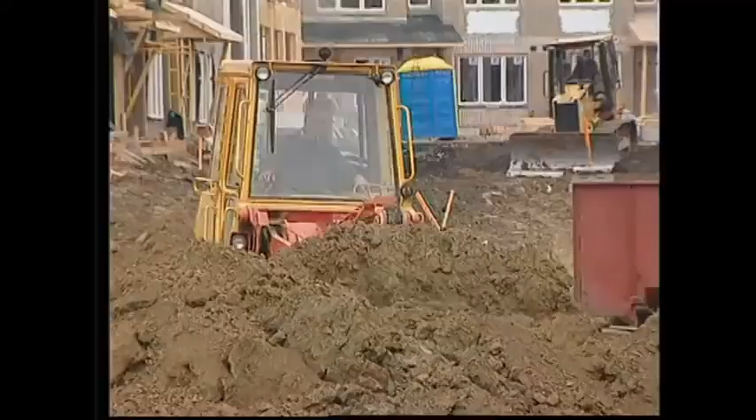Lift truck operators are just like millions of other professionals who earn their living by operating equipment or vehicles. It takes skill, training, and experience, realizing that no job on the ground or in the air can be done at the expense of safety. Remember, you're working on a piece of machinery that weighs about 9,000 pounds. With a load, it increases up to 14,000 pounds. That's equivalent to 6 cars.

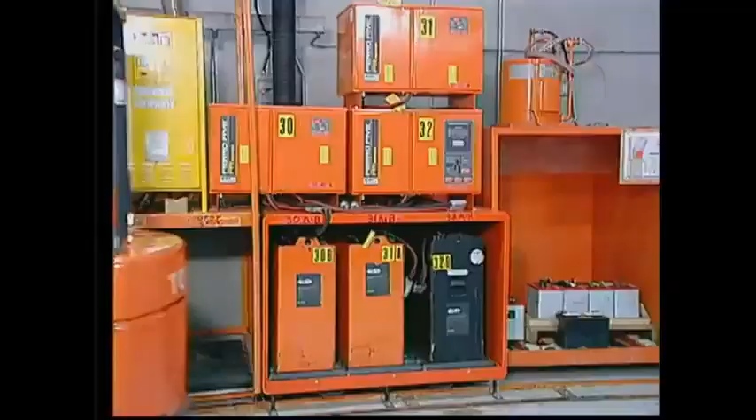Lift truck operators have a difficult job. They lift heavy loads and they maneuver in tight spaces. Safety isn't something anyone sets out to ignore, but tight schedules, heavy equipment, pedestrian traffic, and congested workspace can compromise safety any hour, any minute, any time.

Unfortunately, accidents can happen, but accidents happen more and cost more than we realize. Between lost time, increased insurance premiums, and litigation, it's common for accidents to cost a company over $1 million. Some companies cannot survive the aftermath and close their doors permanently. Then there is personal injury. Let's not forget the family, especially the children. One accident can cost a child a lifetime of happy memories.

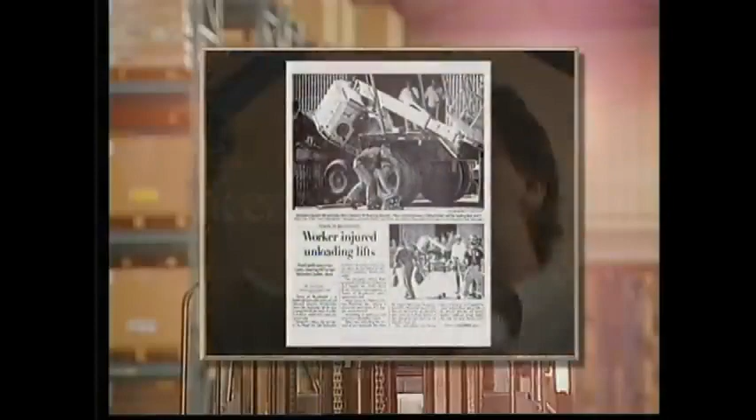But we can improve safety with the right training and the right rules. Government studies have shown effective training programs improve lift truck operators' safety performance by as much as 70%. OSHA, the Occupational Safety and Health Administration, estimates that there are 68,000 accidents every year in the U.S. involving lift trucks. Of those, over 100 people are killed. Here's how the accidents break down in terms of causes.

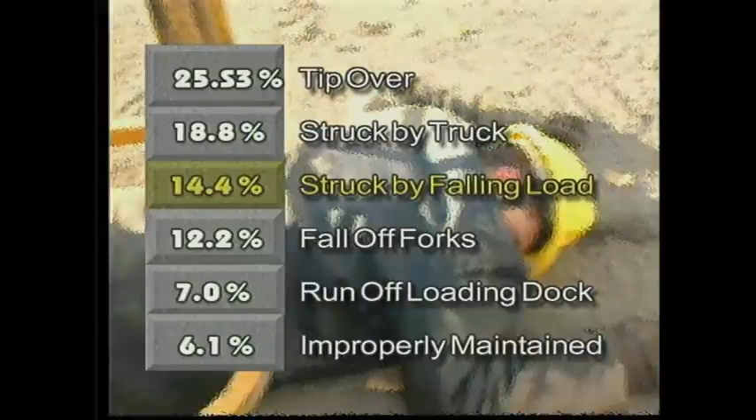25.53% tip over. 18.8% personnel are struck by a powered industrial truck. 14.4% personnel are struck by a falling load. 12.2% employee falls off elevated forks. 7% the lift truck runs off a loading dock or other surface. And 6.1% the lift truck is improperly maintained.

With numbers like these and the cost of accidents, it's no wonder that OSHA requires that employers give proper training to all their lift truck operators. It also states that only trained and authorized personnel can operate a specific piece of equipment.

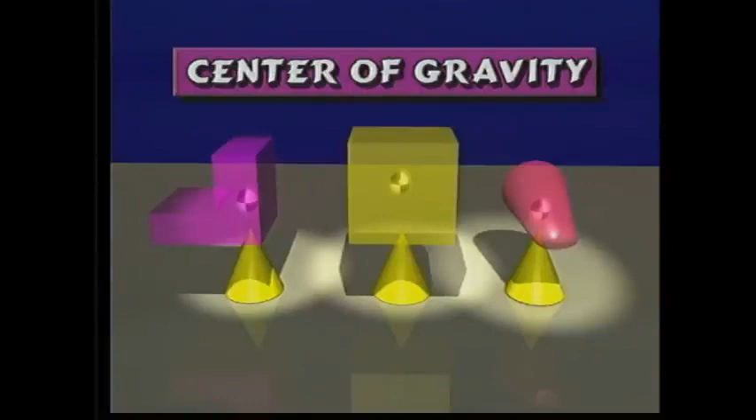Now, let's look at loads. Every object has a center of gravity. These three loads are all the same weight, but because of their different shape, they have a different center of gravity or balance point. When a lift truck picks up a load, the center of gravity of the truck and the center of gravity of the load will produce the combined center of gravity. The combined center of gravity will move in the same direction that the load moves.

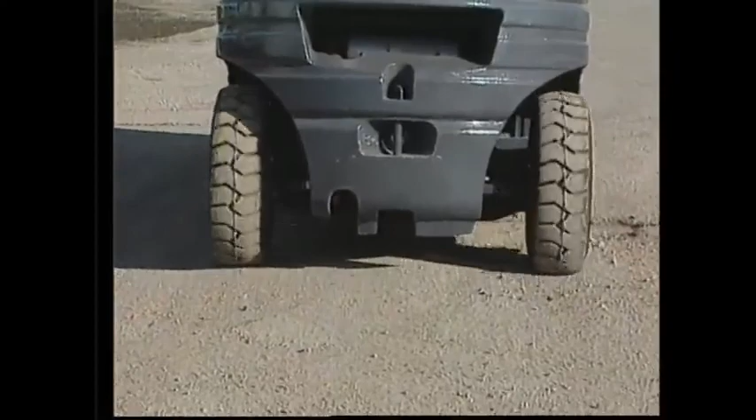A typical counterbalance lift truck has a three-point suspension system. The rear axle pivots at a single point in the center of the axle to compensate for uneven floors. This forms the stability triangle base. With the added dimensions of lift height, it forms a three-dimensional triangle similar to a pyramid. When the combined center of gravity stays within the triangle, the truck is stable. Move the center of gravity forward of the triangle, as when a load is too heavy or too high, the truck will tip forward. This is called longitudinal stability.

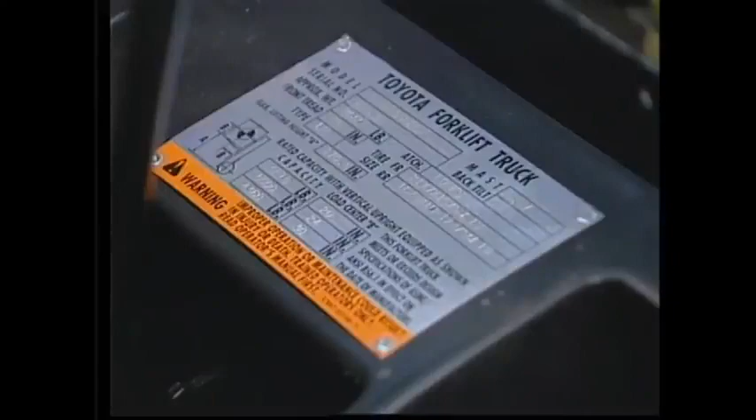Now, a truck must have a nameplate. This shows the maximum weight it is allowed to lift. This truck can lift 5,000 pounds, based on the load having a 24-inch load center. The load center is the distance from the face of the forks to the center of gravity of the load.

In this example, this 5,000-pound truck with a 24-inch load center will attempt to lift this 5,000-pound load. However, because of the unusual shape of the load, the center of gravity of the load is 30 inches from the face of the forks. Notice how the rear wheels lift off the ground when the capacity of the truck is exceeded. Now, if the truck lifts the load from the opposite side, the center of gravity of the load is only 18 inches from the face of the forks.

This load can now be safely lifted. The nameplate will also show the maximum lifting height. The higher the lift, the lower the capacity.

Attachments such as this carton clamp actually reduce the capacity in two ways. First, the carton clamp moves the load away from the operator, reducing load capacity. Secondly, the weight of the clamp will further reduce load capacity. This 4,000-pound truck will now be rated or limited to lifting a load of 2,500 pounds or less.

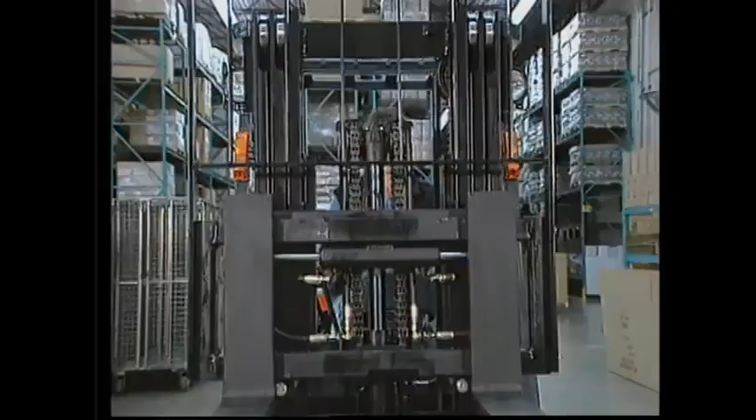If a new mast is installed that changes the maximum lifting height, or if an attachment is changed or installed, a new nameplate must be requested and installed.

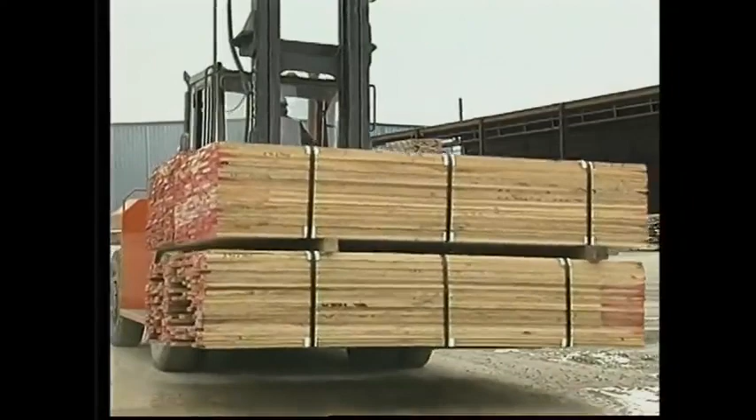Over 1/4 of all lift truck fatalities occur when a lift truck tips over. Understanding the principle of lateral stability will reduce the chance of your truck falling sideways. What do you think? Is a lift truck more stable with a load or without a load while turning? As this lift truck turns with a load, the combined center of gravity moves towards the edge of the triangle.

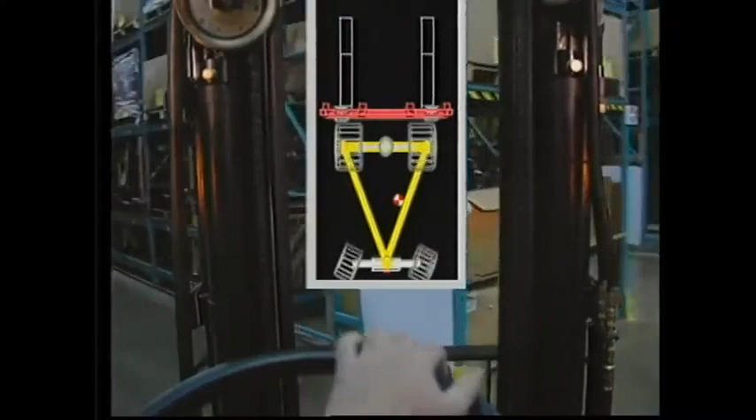Now, notice what happens when we complete a similar turn, this time without a load. Notice the center of gravity is much closer to the edge of the triangle. The closer it is, the less it takes for the truck to become unbalanced and tip over. This is why an unloaded truck should be operated just as carefully while cornering.

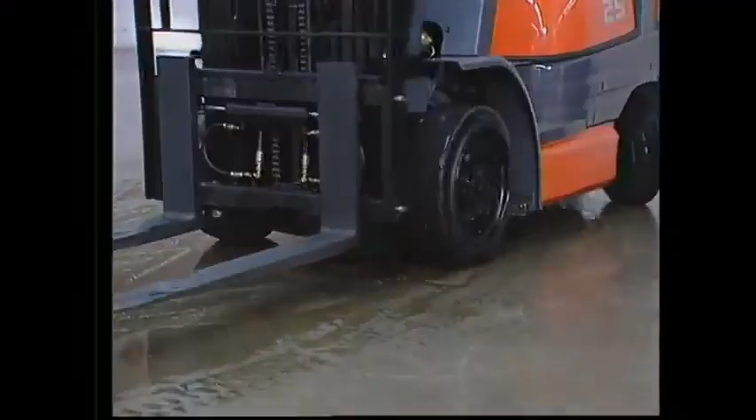Let's look at some causes of tip-overs. Sharp turns, raised masts, unstable loads, potholes, uneven surfaces, wet surfaces, and driving on ramps, to name a few.

On October 17, 1994, Scott was operating a lift truck outside. He was attempting to pick up a load of empty pallets. While making a sharp turn, he hit a small pothole. Scott was fortunate. He had been properly trained. He knew how to best survive a tip-over situation.

First of all, Scott was wearing a seatbelt. When the lift truck tipped, he stayed inside the operator compartment, his best chance for survival. He braced his feet and held on tight to the steering wheel with both hands while leaning in the opposite direction of the fall. Scott was able to escape with minor injuries.

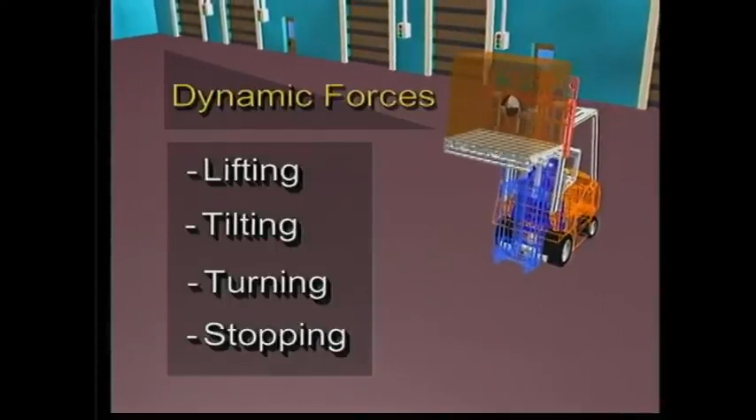Never attempt to jump out of your lift truck if you encounter a tip-over. Had Scott tried to jump clear of the truck, the overhead guard would have struck him, crushing him to death. When a lift truck is in motion, the dynamic forces such as lifting, tilting, turning, and stopping can cause the combined center of gravity to move outside the stability triangle, causing the lift truck to tip over.

When operating a Class 1 stand-up lift truck, operators must be aware of the causes that result in a tip-over situation. These are overloading, traveling with elevated loads, braking or accelerating sharply while turning, handling off-center loads, traveling at excessive speeds, falling from docks, dock plates, and trucks and trailers, to name a few.

With a counterbalance lift truck, the operator is instructed to stay with the truck when it tips over. Stand-up lift trucks are different. In the event your stand-up lift truck is involved in a tip-over or off-the-dock accident, you can be severely injured or killed. To minimize your risk of injury, it is recommended that you step off the rear of and away from your stand-up truck. Safety authorities such as OSHA state, when a stand-up rider tips over laterally, the operator must be trained to step off the vehicle toward the rear of the vehicle.

In this example, the truck is turning a corner too fast with the load raised. As the truck begins to tip, the operator senses this emergency situation and steps out of the operator compartment. In this next situation, the truck is approaching the loading dock too quickly and slides on a wet surface. Unable to stop, the truck continues over the edge. The operator senses this emergency situation and steps out of the operator compartment.

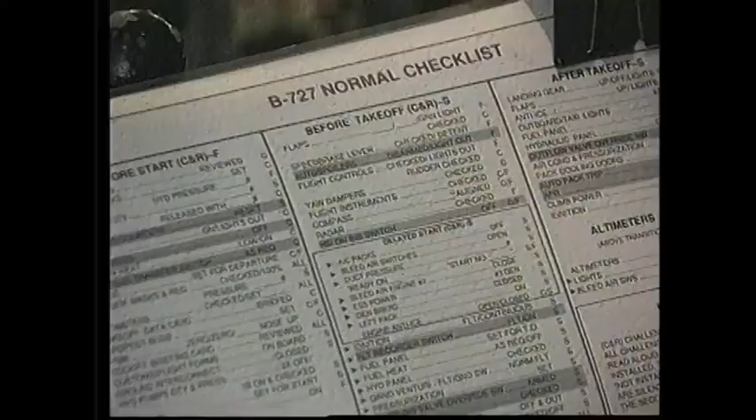When you put your life in the hands of professionals, you do not want them to cut corners. Pilots, for example, use a checklist to do a pre-flight inspection before every flight. 99 times out of 100, everything checks out okay. But it is the pre-flight inspection that contributes greatly to safe air travel.

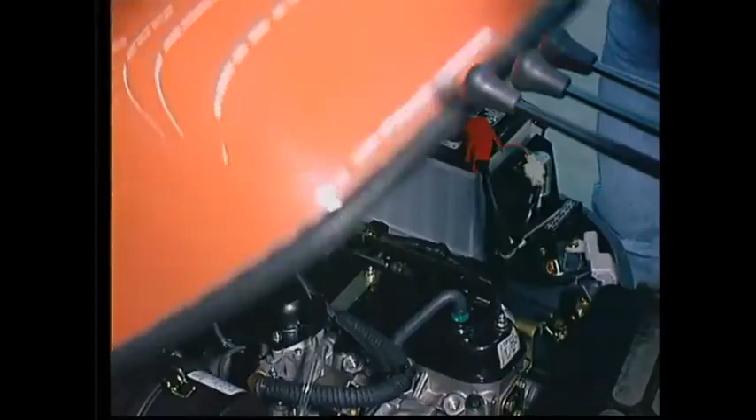It's the operator's responsibility to inspect the lift truck before the beginning of each shift and keep a written record. At times, this task may seem unimportant. However, 6.1% of accidents are caused by improper maintenance procedures. The objective of the inspection is to look for damage and to make sure the truck is in safe operating condition and meets the manufacturer's specifications.

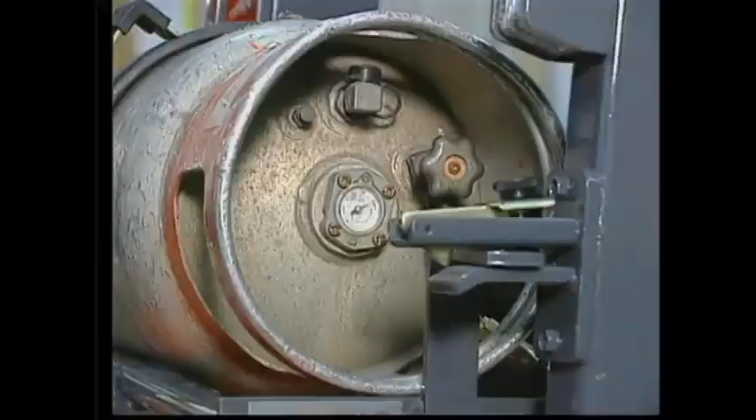A good place to begin an inspection is at the fuel source. In the case of an electric truck, start at the battery. With a propane truck, begin with the liquid propane cylinder. Make sure the locating pin is in place and the pressure relief valve is pointing upwards. Check the fuel level. Don't take a chance on running out where it is dangerous to refuel.

Check the connectors and hoses. Then listen, smell, and look for leaks. Frosting will indicate even the smallest leak. Be careful. Touching this with your bare hands can cause a serious frost burn. Check the cylinder tie-down latches to make sure the propane cylinder is secure.

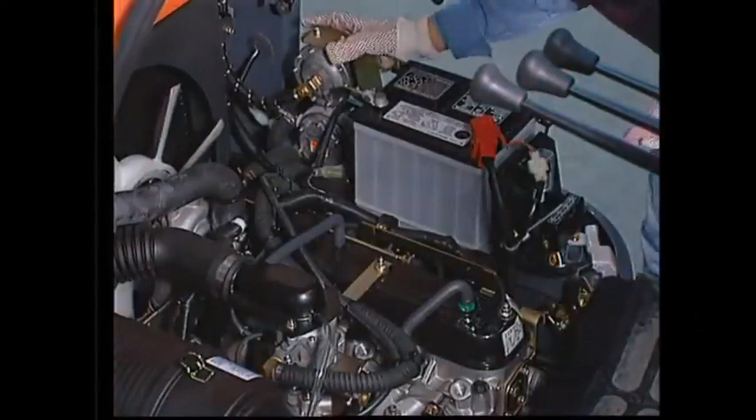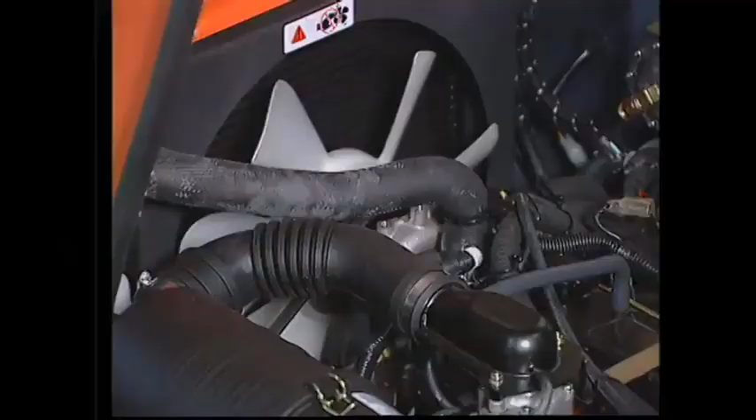Open up the engine cover and inspect the engine compartment and fluid levels. Check the battery, the engine oil, transmission fluid, the fan belts and hoses. It's important that they are not frayed or worn. Check the brake fluid reservoir,

hydraulic oil level, the radiator coolant, and finally, inspect the air filter. A dirty filter can increase harmful or poisonous exhaust gases. Close the engine cover and secure the propane cylinder.

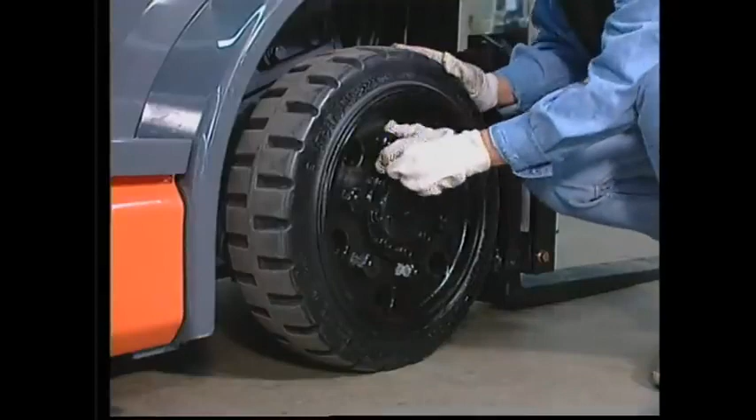Next, inspect the tires and wheels on the right side of the truck. Ensure the overhead guard is in good shape. Are the lug bolts present and tight to the touch? If not, call for repairs. Loose or missing lug bolts can cause damage to the truck or injure someone. Remember, do not operate the lift truck until repairs are made.

Are there chunks of tire missing? Cuts or objects embedded in the tires? How about wire, plastic strapping, string or foreign objects lodged in behind the wheel? These can cause costly damage or serious injury.

If you're inspecting a truck with pneumatic tires, check the air pressure as outlined in the operator's manual. An underinflated tire will lean the truck to one side and will decrease stability. Notice that when the load is being lifted, it is actually moving away from the center of the truck. It wouldn't take too much to tip this truck over.

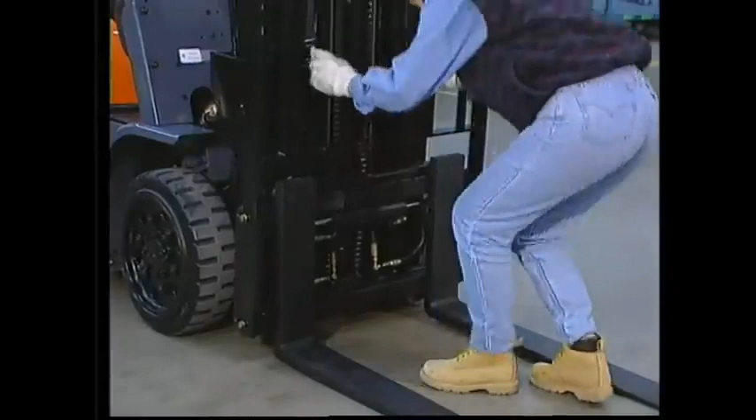Examine the mast and forks. The forks must be level. Look for excessive wear or cracks in the hanger welding or in the heel. The forks must be evenly spaced and the fork pins locked into place. Equal tension in the lift chains is important. This will prevent uneven lifting. Verify that the chain is well lubricated.

Inspect the hydraulic tilt cylinders and lift cylinders. They must be free from leaking hydraulic fluid. Inspect the hoses around the mast. This is where leaks often start. Make sure the mast channel is free of foreign objects, such as pieces of wood or wire. Complete a thorough examination of the wheels and tires on the left side of the truck.

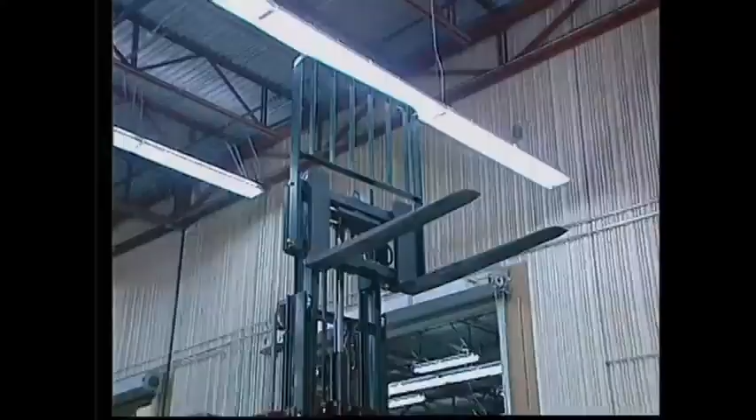To start the engine, make sure the parking brake is on. Listen for any unusual noises as the engine warms up. Pull the lift lever and fully raise and lower the forks to ensure free movement of the mast. Once the forks have been lowered, test the side shifter or any attachments if installed. Tilt the mast back and forth, making sure all hydraulic movements are smooth and operational.

Release the parking brake and drive forward or reverse about 20 feet in total, ensuring the steering and brakes are working properly. Check the brakes. The brake pedal must not reach the floorboard. If it does, the brakes are not functioning properly and the truck should be taken out of operation until repaired.

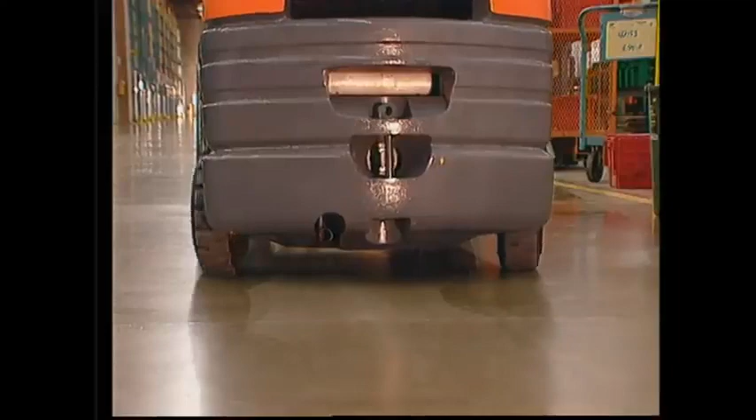When finished, turn off the engine and apply the parking brake. Look under the truck to check for any oil leaks. Oil patches can cause serious injury to pedestrians. Next, inspect the horn, lights, and gauges. Observe pedestrian warnings and any other electrical systems your truck might have.

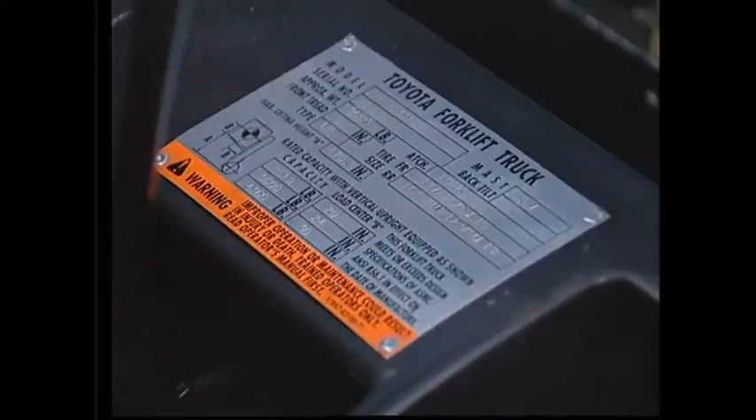A lift truck cannot be put into service until it has a legible manufacturer's nameplate securely fastened. Make sure the seat belt is not frayed or torn and that it latches properly. All safety labels and instructions must be in place and readable. The overhead guard and load backrest extension are important safety features. Make sure they are in place and secure.

Finally, complete and file an operator checklist and report any defects to your supervisor in writing. If you're on the job and notice that your truck is unsafe to operate, park it and tag it out of operation. Report specific problems to your supervisor. Remember, failure to do this could cause injury to yourself and to the employees working around you.

Rules of the road. If you decide to ignore them, you endanger your life and the lives of others. There are federal laws that have established rules for lift trucks. OSHA requires that you be trained and authorized by your employer to use a specific lift truck.

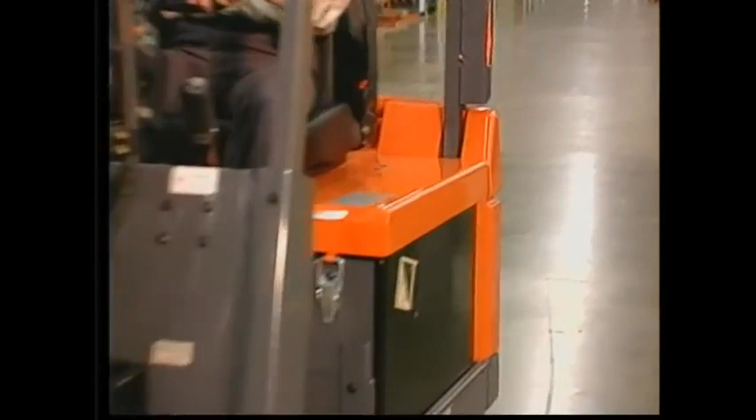Here's how the Industrial Truck Association has classified lift trucks. They fall into 7 main categories. Class number 1, electric motor rider trucks. Class 2, electric motor narrow aisle trucks. Class 3, electric motor hand trucks.

Class 4, internal combustion engine trucks, cushion tires only. Class 5, internal combustion engine trucks, pneumatic tires only. Class 6, electric and internal combustion engine tractors. And Class 7, rough terrain forklift trucks. This video addresses only sit-down counterbalance lift trucks, as described under Classes 1, 4, and 5.

Lift trucks are also designed to work in specialized areas. Underwriters Laboratories has designed specifications for lift trucks working in hazardous areas. A spark can be created by either an electrical system or internal combustion exhaust, causing flammable material to ignite. Make sure your truck is properly rated for the specific conditions of your job.

Before anyone operates a lift truck, they must follow certain safety procedures. Proper safety equipment should always be worn. The wearing of safety equipment, such as safety shoes, is standard operating procedure. Many applications require hard hats, eye protection, or tethers to be worn. When entering the truck, always use a 3-point entry system and fasten your seatbelt. Your specific application may require you to use additional safety equipment. Check with your supervisor.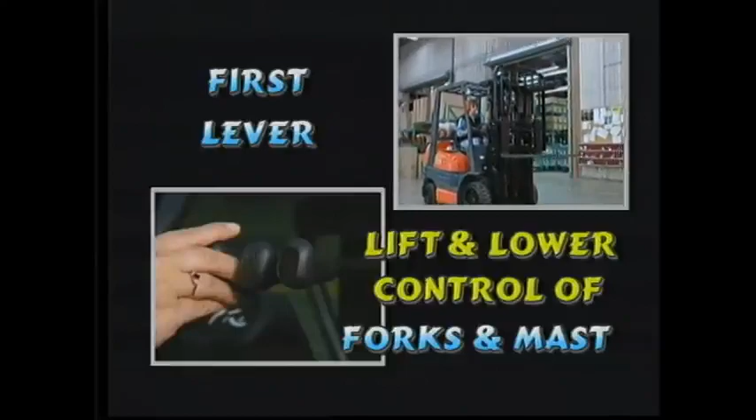Lift trucks have similar controls as cars do: a steering wheel, accelerator pedal, foot brake, parking brake, and key switch. In addition, lift trucks have a directional control lever and hydraulic control levers. On most trucks, the first lever activates the lift and lower control of the forks and mast. The second activates the mast tilting action. The third works as an auxiliary function for an attachment such as a side shifter or a clamp. Remember, using attachments requires specialized training.

Lift trucks need to be highly maneuverable to work in tight places. That's why they steer from the rear. Watch out for tail swing when traveling forward. When cornering, keep the front wheels close to the inside aisle and start turning. This allows room for the rear end to swing out in the opposite direction.

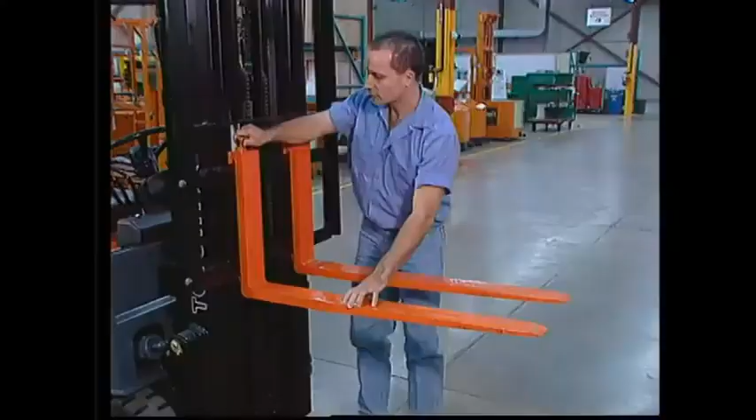Before you pick up a load, make sure your forks are spread as far apart as possible and are long enough to stabilize the load. And remember that the forks must be at least 2/3 of the length of the load to keep it balanced. If the load is over your lift truck's capacity, it must be broken down into smaller loads or use another truck with the proper capacity.

While traveling, make accelerating, braking, and turning a smooth and fluid motion. This will minimize the chance of the load falling off the forks. Keep in mind that 14% of all fatalities involve someone being hit by a falling load. Loads must be stable before you move them. Never reach through the mast to reposition the box. Instead, get off the truck. Make sure the load is against the load backrest extension with the mast slightly tilted back. The pallet should be no more than 4 inches off the ground while traveling.

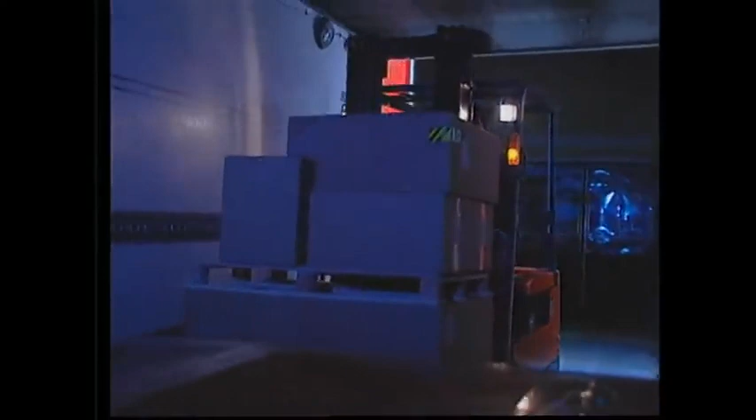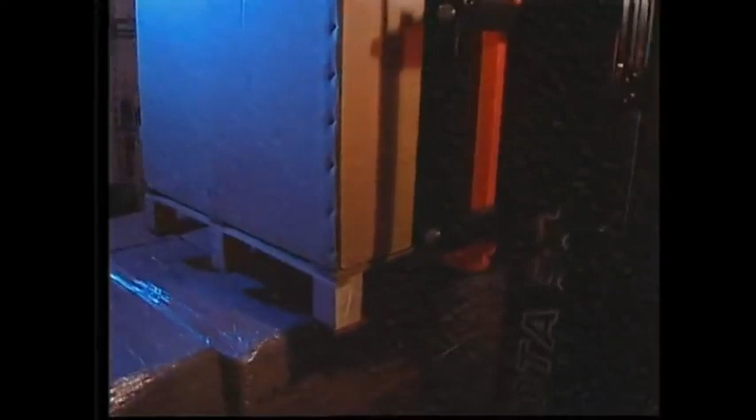On September 21st, 1995, a 31-year-old man was loading a trailer. A box fell off the top of a pallet and onto the floor. The operator put the truck in neutral and went to pick up the box. He did not engage the parking brake. He was pronounced dead at the scene. Cause of death: suffocation.

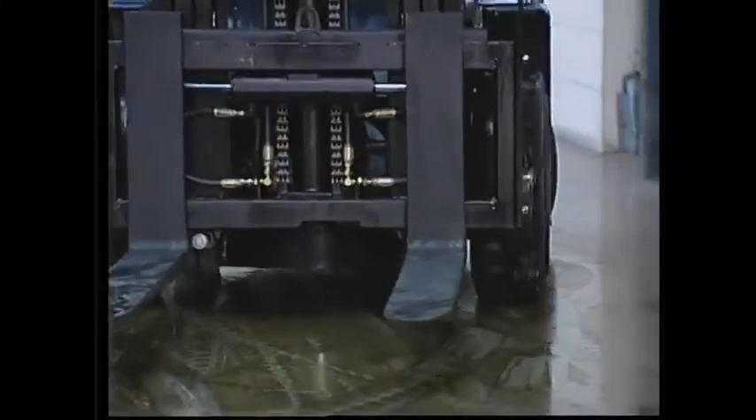Bumps, rough or uneven surfaces, and debris demand your full attention. These can upset your load or unbalance your lift truck. Drive with extra caution when in these environments. If you are carrying a large load that blocks your view, travel carefully in reverse. Use all of your field of view to guide yourself. Wet floors can be a real hazard. Braking and steering can become greatly reduced or non-existent. Drive slowly on wet surfaces.

Before lifting, you should do a quick mental check to question things such as the weight of the load. Is the load stacked securely? And will it fit in the rack? Remember, only raise the load when you have come to a complete stop and are in good position for the lift. Make sure the path is clear and tell anyone nearby to stand back because you will be lifting.

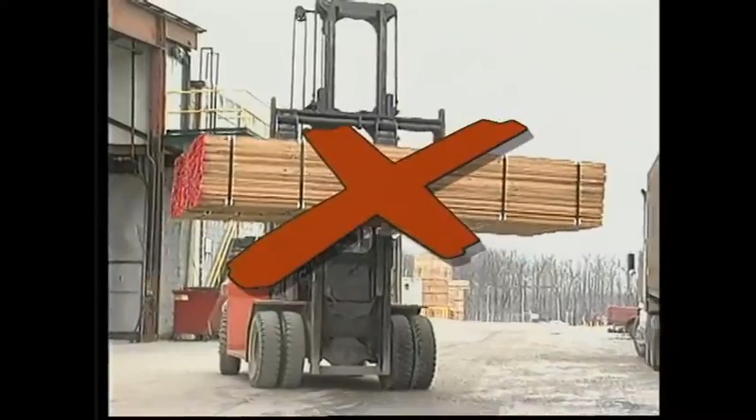Once the load is in position, tilt the mast so that the pallet is level and slowly lower the pallet until it rests on the rack. When the forks are clear, lower them while remaining at a complete stop. Some operators think it's okay to lift and lower the load while they are traveling. Wrong. The lift truck must be completely stopped. Watch out for overhead hazards such as sprinklers, heating systems, and low-hanging doorways.

Electric trucks can also brake by changing the direction of the forward-reverse control lever. This is called plugging. It's a common way to stop the truck, although the foot brake is quicker and more dependable. Remember to stay inside of the driver's compartment at all times. Do not place your hands or feet on or outside of the overhead guard. This is a bad habit that causes many serious injuries.

When crossing railway tracks in a lift truck, angle your truck and proceed slowly. Cross the tracks one wheel at a time to stay in balance. Crossing railway tracks directly will make your truck unstable. All floors and elevators have weight restrictions. Remember to combine the weight of the truck and the load to determine the total weight.

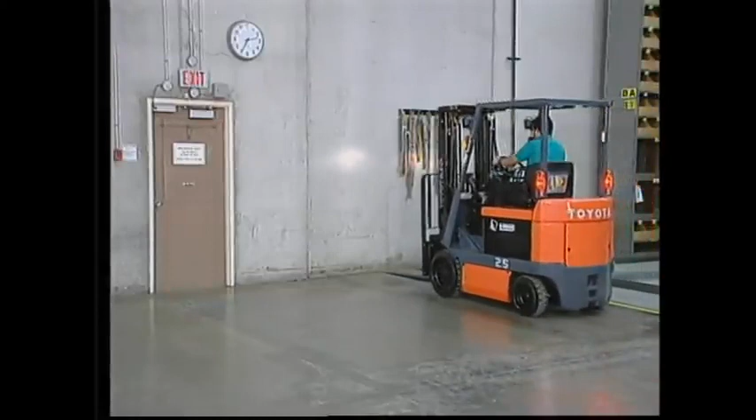When you are finished using the truck, park it in a designated area and remember to turn off the key. Never park in a fire lane or block a doorway. Lower the forks so that they are flat on the ground. Put the controls in neutral with the parking brake on. Turn off the valve on the propane cylinder to prevent a fuel leak. Disconnect the battery connectors if using an electric power truck.

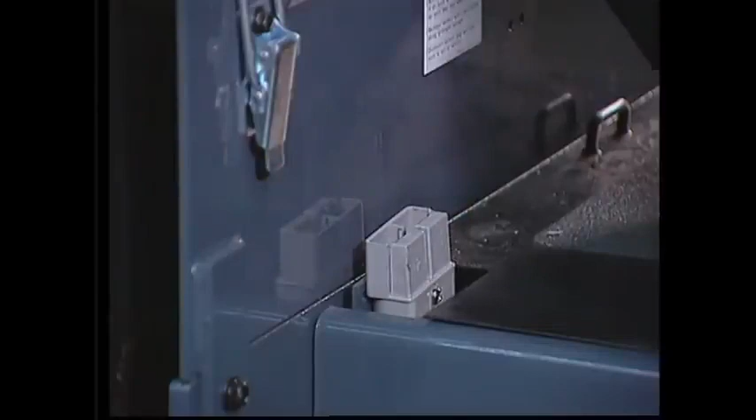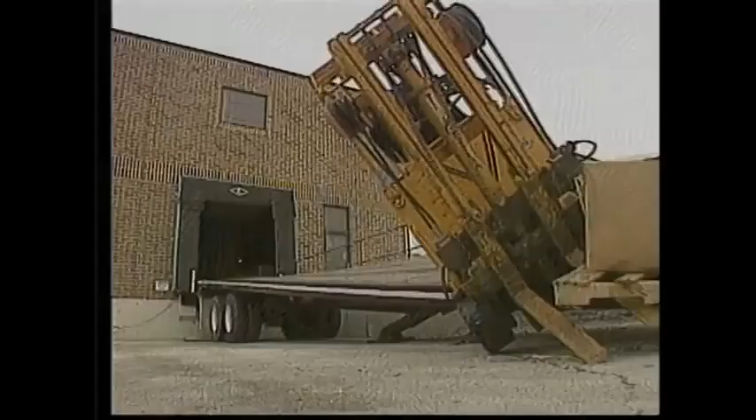Loading docks are busy places for pedestrians and equipment. On average, a lift truck may pass over a dock 100,000 times per year, so there are plenty of chances for accidents. Statistics show that over 7% of accidents happen in the loading dock area. If the area between the trailer and the dock is not safely secured for any reason, the lift truck can fall through the gap, causing injury or death.

A common cause of trailer separation accidents is early departure. This is where a tractor-trailer driver assumes loading or unloading is complete and pulls away from the dock while the lift truck is entering or leaving the trailer. If the lift truck does not have enough time to stop, it can fall off the dock or trailer. Even if wheel chocks are still in place, they offer little protection if the tractor-trailer driver leaves before it is safe.

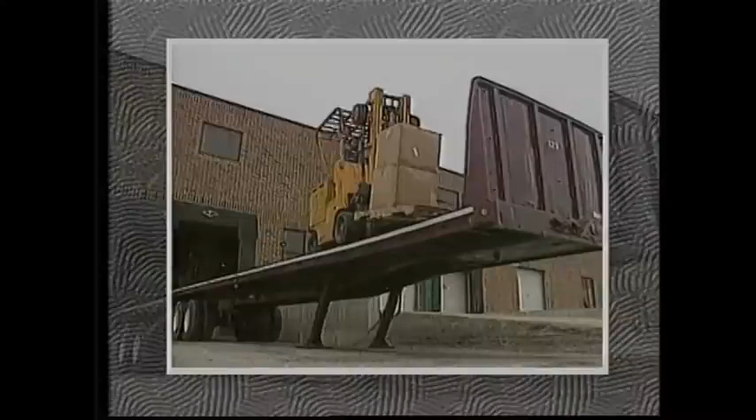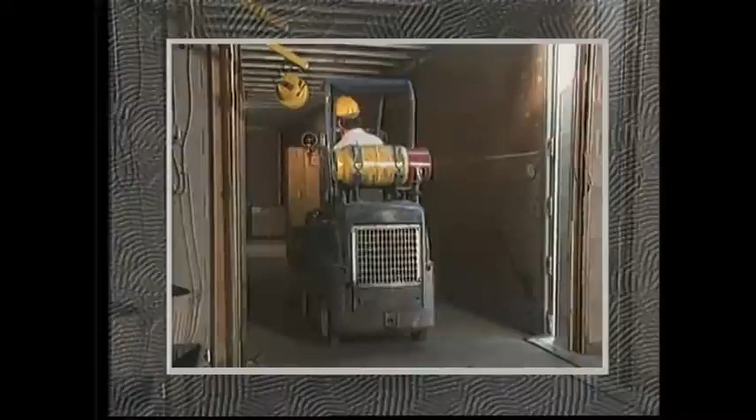Landing gear collapse is another safety hazard. When the tractor has been removed from the trailer, certain safety precautions must be taken. If the landing gear is weak or corroded, it may collapse due to the weight and forward motion of the forklift entering the trailer. Trailer upending is another hazard caused by the heavy loads being placed in the nose of the trailer that exceeds the counterbalance effect of the trailer's rear axle. Therefore, uncoupled trailers must be secured with a support jack before entering with a lift truck.

The most common form of trailer separation is trailer creep. As the lift truck travels on and off the trailer, its momentum inches the trailer away from the dock. To demonstrate this, the wheel chocks have been removed and the brakes released from this tractor trailer. As this moving lift truck stops, its weight forces the entire rig to move away from the dock. This is why the tractor trailer must be safely secured against the dock. Tractor trailer brakes must be engaged and wheel chocks must be properly installed.

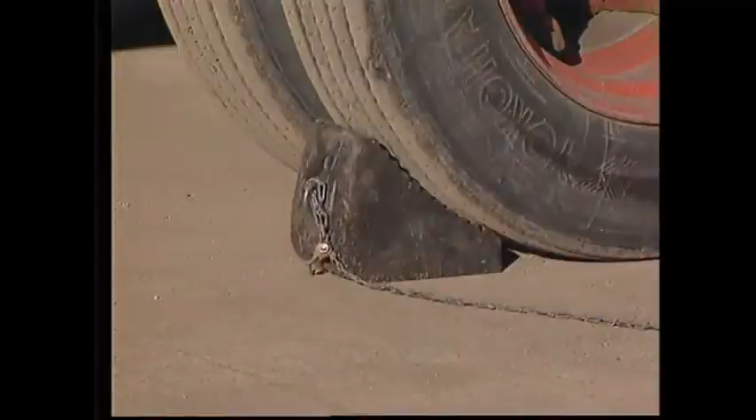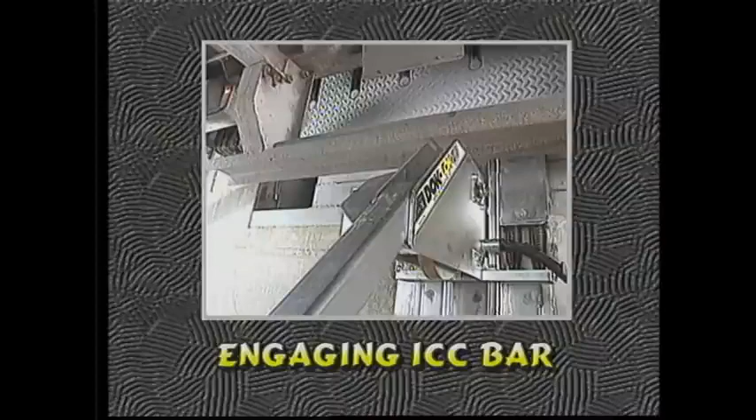However, wheel chocks have their limitations and could fail if placed on ice, gravel, or sand. For increased protection against these types of accidents, many companies have installed vehicle restraints that either hold the trailer firmly against the dock by engaging the trailer's ICC bar or by locking the trailer rear wheels with dual steel barriers.

Lift truck operators are responsible to ensure the trailer is ready for safe loading or unloading. Once the tractor trailer is secure, carefully position the dock leveler in place. Make sure there is proper lighting. Poor lighting increases the chance for injury and/or product damage. The floor of the trailer must be inspected to ensure it is in good condition, and the combined weight of the lift truck and load do not exceed the maximum weight capacity of the trailer.

When backing out, stop at the end of the trailer and look both ways for pedestrians. Accidents on the dock happen every day. By knowing the safety hazards in this area, you can make the loading dock area a safe place to work.

Pedestrians are involved in about 40% of all lift truck accidents. 18% of them are fatal. On August 8, 1993, a man was taking inventory in a warehouse. A lift truck carrying a load of boxed metal parts was stacking a load. While backing out, his forks caught the pallet and it fell.

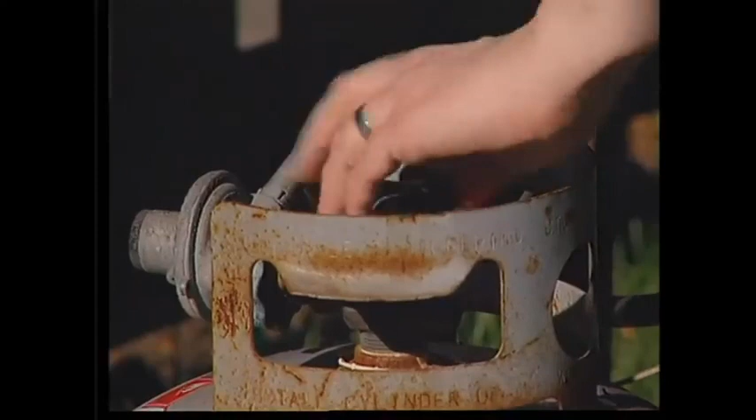Liquid propane gas is a popular fuel for many uses. When handled properly, it's safe. When handled improperly, it can cause serious injury or death. Don't let this happen to you. Liquid propane gas is a liquid that normally boils at minus 44 degrees Fahrenheit. But when stored in a high-pressure cylinder and compressed 270 times, it stays liquid at room temperature.

If released, the expanding gas can cause a serious frost burn when it comes in contact with unprotected skin. For this reason, eye protection and heavy gloves should always be used when handling liquid propane gas. Liquid propane gas is heavier than air and will travel along the ground like water. Escaping liquid propane gas can be extremely dangerous if it is allowed to move to a low area where it can collect and ignite.

Here's how to minimize the chance of liquid propane gas leaking while changing the cylinder. These procedures must be followed. Start by parking the lift truck. Set the parking brake. Lower the forks. Place the transmission in neutral and leave the motor running. Put on your protective safety gear.

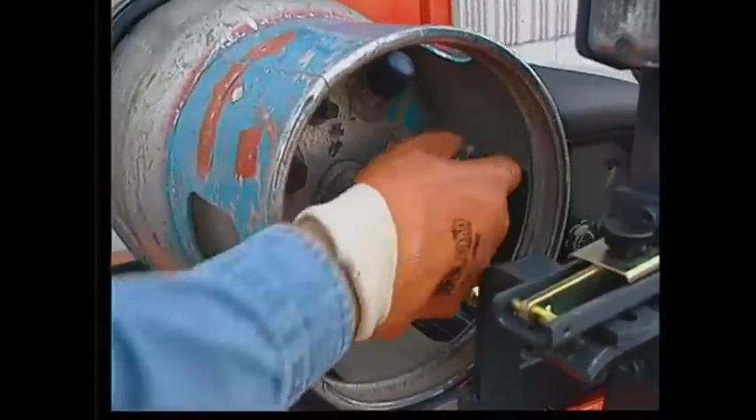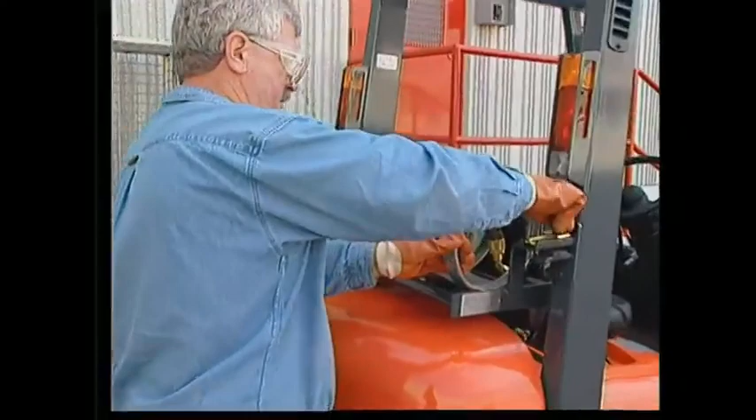Then, turn off the valve on the liquid propane gas cylinder and allow the truck to stall due to lack of fuel. This reduces the pressure of the gas in the fuel lines. Next, turn off the ignition and then try to restart the motor. If the truck will not start, you may proceed. First, uncouple the hose from the valve. Remove the cylinder and store it outside in a safe and approved method.

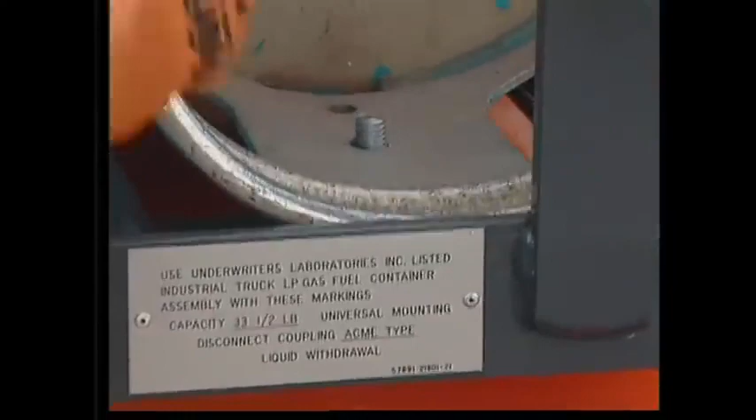When installing the full liquid propane gas cylinder, handle it with care. The liquid propane gas is under high pressure. Check the new cylinder for proper seals and gaskets. Don't risk leaks with a bad O-ring. Now, place the cylinder on the locating pin and set it in the liquid propane gas tank bracket. Remember, the pressure relief valve always points upwards.

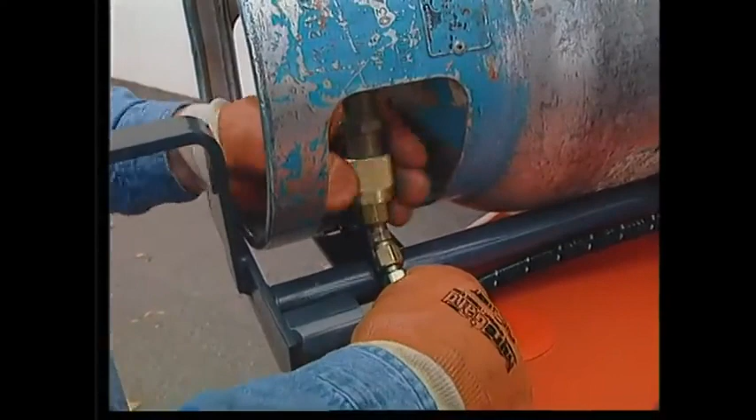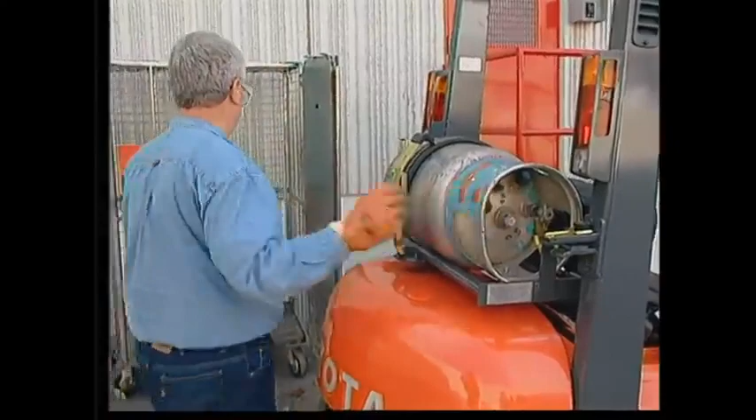Secure the cylinder with the bracket restraints. Open the valve slowly. Look, listen, and smell for leaks. Frost on a fitting is a sure sign of a dangerous leak. Ensure that the cylinder is secure. Now you're ready to go.

For diesel or gasoline refueling, drive the lift truck close to the pump and turn off the truck. Open the gas cap and feed the nozzle into the tank opening. Turn on the pump and proceed to fill the tank. Do not fill the tank completely. This will minimize the chance of fuel spilling out while driving.

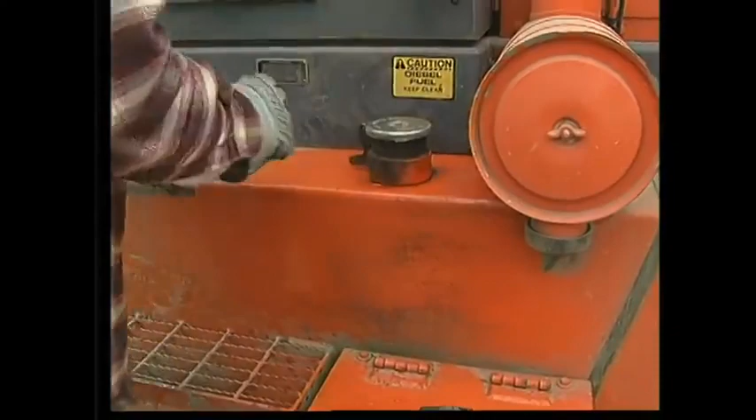When finished, replace the cap and clean up any overspill with a cloth. Finally, start your truck and proceed with your work in a safe manner.

In many ways, industrial batteries are like young infants. They need to be changed and cleaned regularly. If they become too tired, they start to act up. They constantly need to be replenished with water. But given too much, they'll spit up all over. If you take care of your battery, it will last for many years. Ignore it, and you will have problems.

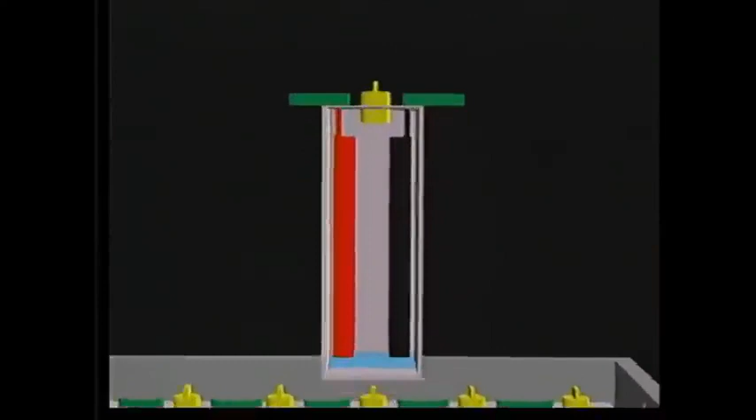The typical industrial battery is really a series of individual cells joined together by lead connectors. Each cell has a positive post and a negative post. The cell is filled with a solution of sulfuric acid and water called electrolyte. Each cell generates approximately 2 volts of electricity.

When it's time to recharge the battery, park the lift truck with the emergency brake on. It is best to recharge the battery when it's out of the truck. But if that's not possible, fully open the battery compartment to allow heat and hydrogen gas to escape. Hydrogen is a highly flammable gas, and for this reason, batteries must only be charged in well-ventilated areas. No smoking or open flames are permitted.

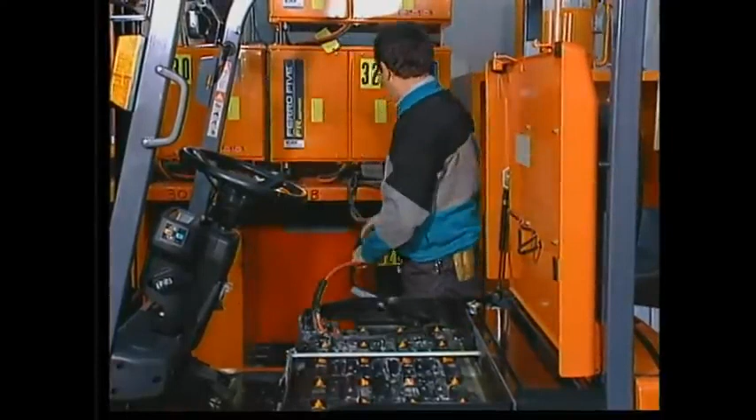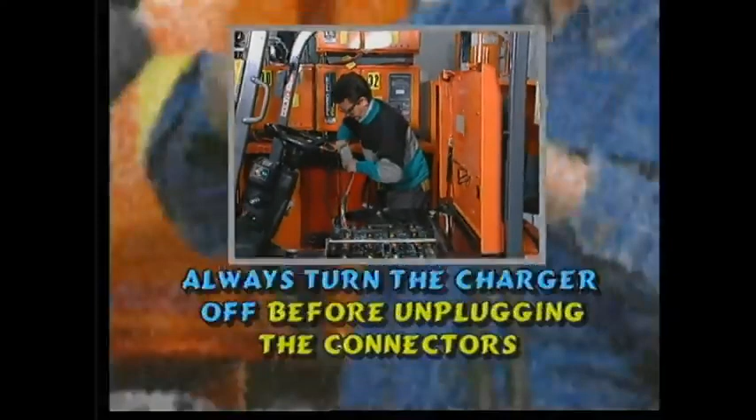Unplug the battery connector from the truck and attach the charger connector to the battery, never to the truck. Check the cables for wear and the connectors for damage. Turn on the charger following the manufacturer's instructions. When the charging process is complete, always turn the charger off before unplugging the connectors.

In March of 1995, a newly trained operator was testing the electrolyte with a hydrometer. He was not wearing any face protection.

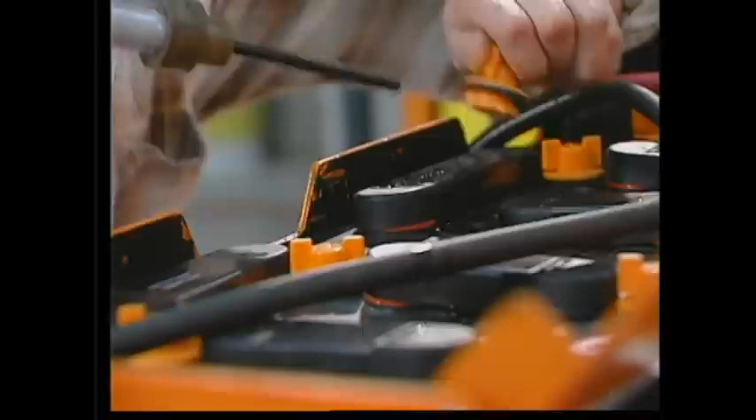He squeezed the hydrometer too hard. This caused the electrolyte to spray up on his face. He immediately went to an eye wash station. Luckily, he was trained on what to do if he came in contact with acid and suffered no injuries.

You should always wear protective equipment when you're anywhere near battery acid. Gloves, goggles, and a body shield are mandatory. Have an eye wash station nearby. If acid gets into your eyes, go immediately to the eye wash station and run water over the affected area.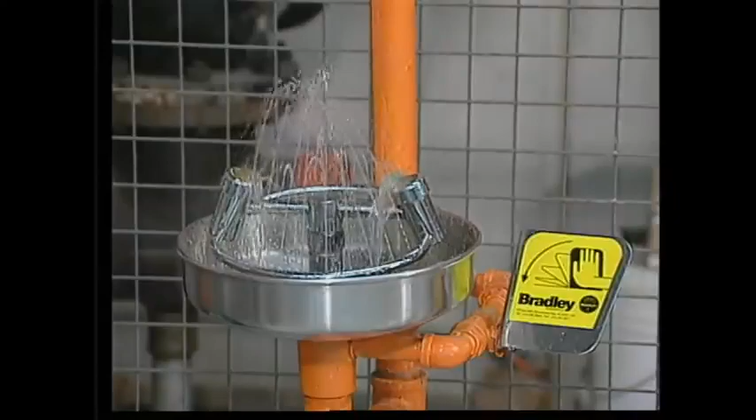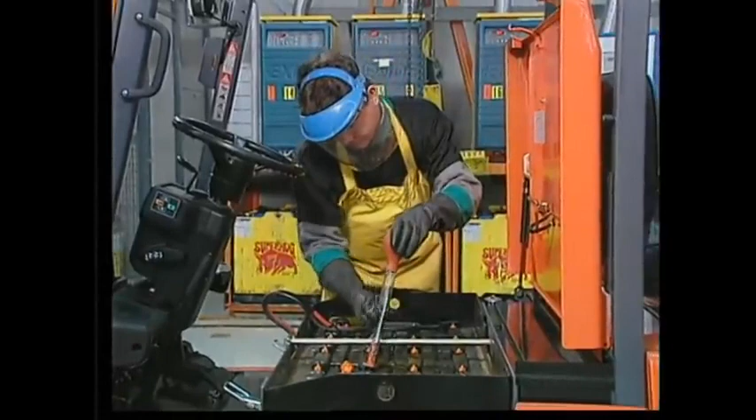Then, get medical attention. After charging, remove the caps of 3 or 4 cells to determine the electrolyte level. Only a flashlight can be used to look into the cells. When the battery is fully charged, the electrolyte has a high acid content. This can be tested with a hydrometer. By testing a small sample of electrolyte, you can determine how much energy is in a cell. This will also locate bad cells in a battery.

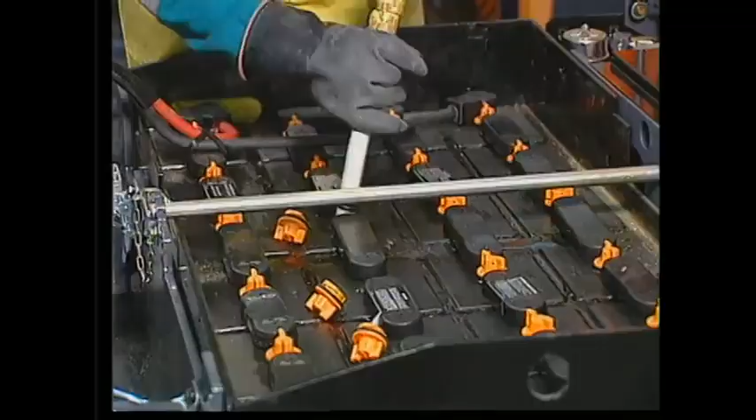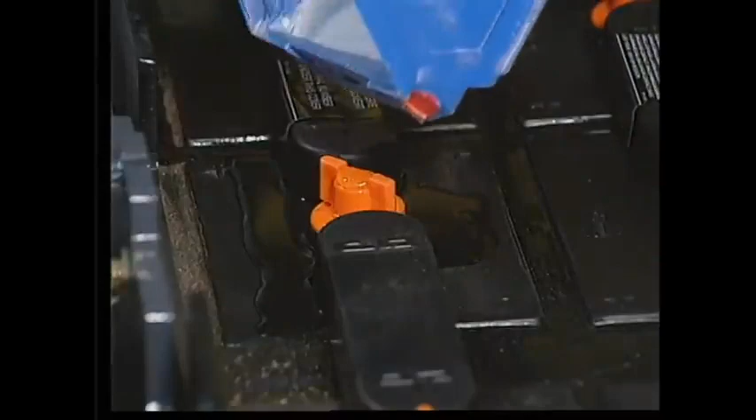To avoid acid spills, only add water after charging. Adding too much water before charging will cause overflow during charging and create a hazardous spill. If electrolyte does escape, it must be neutralized with baking soda and water.

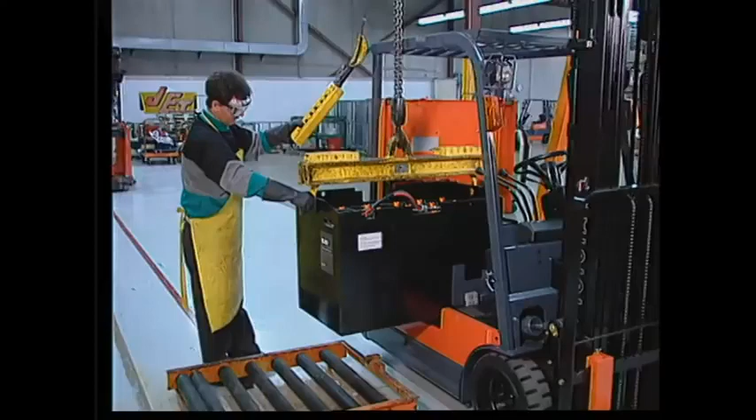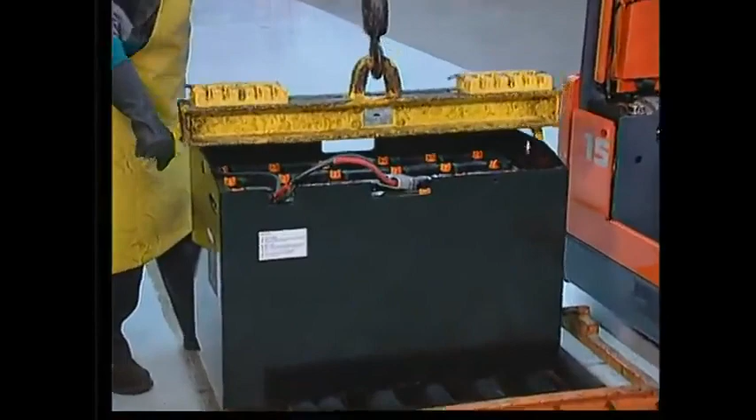Many people use a crane to remove the battery from a lift truck for maintenance. Carefully attach an approved insulated lifting beam to the battery and lift it out. Place it near the charger, then pick up the freshly charged battery. Be careful, the battery weighs thousands of pounds and can crush your hands or feet. Use only equipment designed for this purpose.

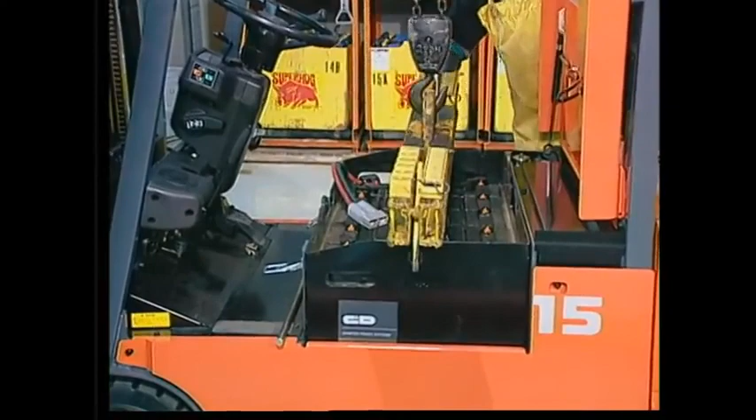Electric trucks depend on the battery to balance their loads. Use a battery that is the proper weight and voltage. Check the lift truck's nameplate and compare it with the battery's weight and voltage as marked on the battery casing. Join the connectors and close the cover.

Some trucks use battery slides. Remove the safety gate and roll the battery out of the truck. In order to align the fresh battery to the battery compartment, connect extension cables. Then, drive the truck into position. Remove the extension cables and roll the fresh battery into the truck. Replace the safety gate, and then connect the battery cables.

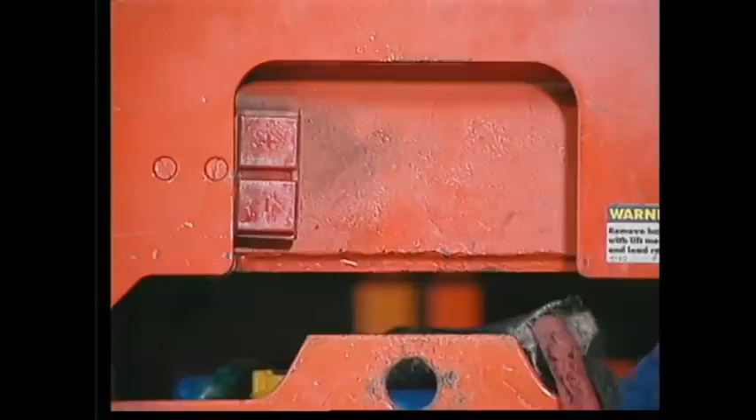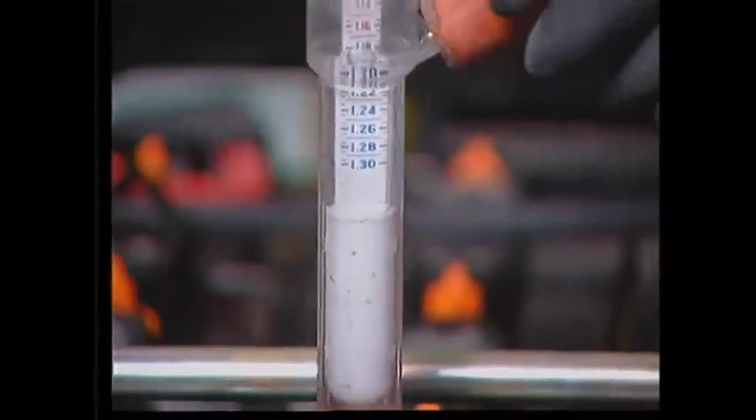Here are 10 tips on how to get the most out of your battery. Follow the manufacturer's instructions. The life of a battery and your lift truck controls can be severely shortened by not following the manufacturer's instructions on charging and maintaining the battery. Inspect the connectors. A loose, cracked, or pitted connection can cause arcing or sparking. Don't use the connector as a switch. Always shut off the charger when connecting or disconnecting the battery.

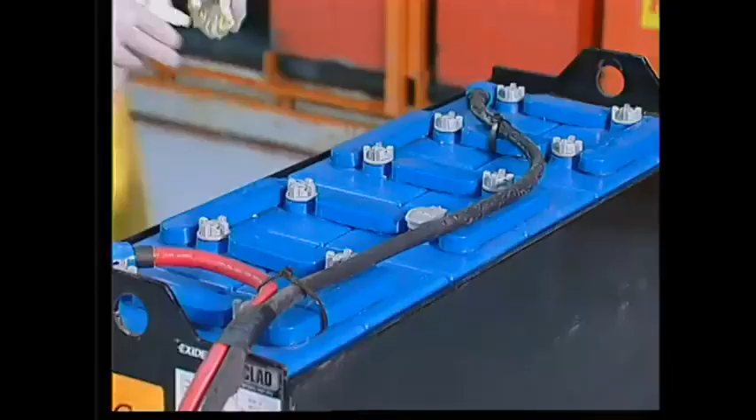Add water after charging. Charging increases the electrolyte levels in cells and can cause overflowing. Overflowing means a loss of electrolyte and damages your truck. Keep it clean. Batteries and their compartments should be kept clean and dry. If electrolyte is spilled on top of the battery, neutralize it immediately with a solution of baking soda and water. Always wear a face mask or goggles, rubber gloves, and a rubber apron when cleaning batteries. Don't lay tools on top of the battery.

Battery gases are explosive. Keep vent caps in place. Vent caps allow gas to escape and keep foreign objects from falling into the cell. Remove vent caps only to add water or to take hydrometer readings. Keep your battery cool. A normal charge can increase the temperature of a battery by 15 degrees or more. Operating hot batteries shortens their overall life. Allow the battery to cool down at least the same length of time that it was charged.

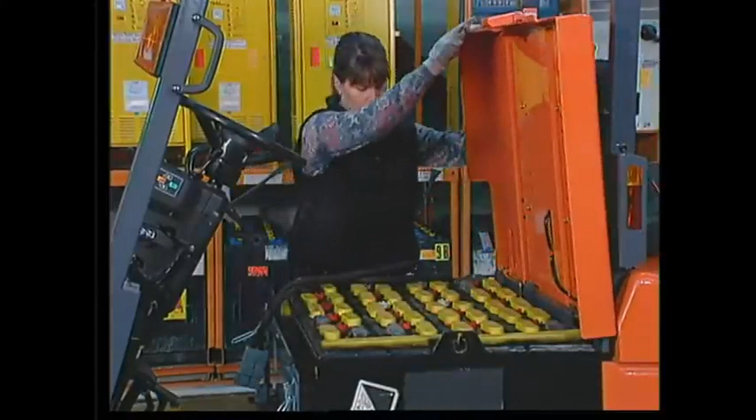Don't overcharge. No amount of overcharging can increase battery capacity, and it substantially shortens battery life. No smoking, sparks, or open flames in the area. Charge in a well-ventilated room. If electrolyte gets in contact with your skin or eyes, rinse thoroughly with water for at least 10 minutes and get immediate medical attention.

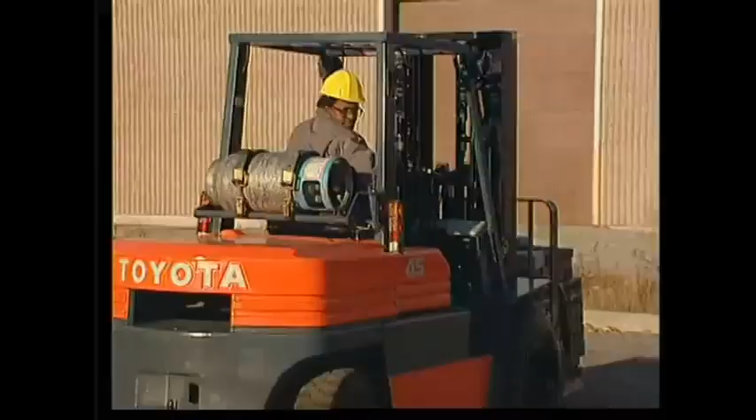Safe operation of a lift truck is knowing your equipment and following the rules of the road daily. Take pride in knowing that your performance affects you and your fellow workers. Your biggest job is ending your workday safely and returning to your family and friends. It's hard to play the game when you're injured. So learn to do your best so we can all get home.